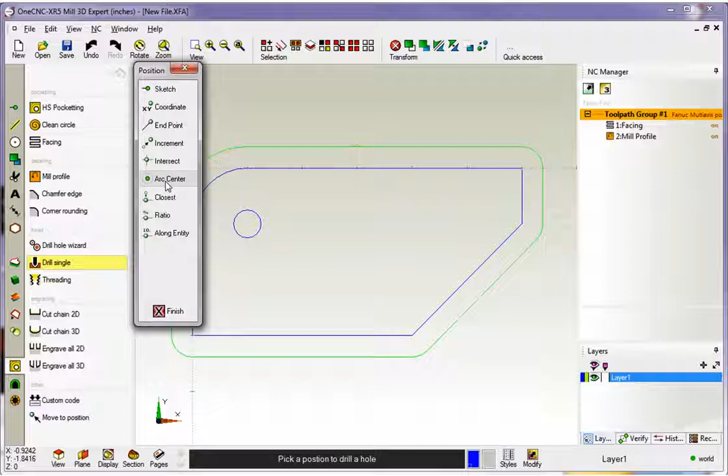I'm going to go with arc center. Just left click that, take my cursor and just left click on that arc center, and there we go, the location's in there. Now once we have the location, just like with these operations here, when we're done selecting, you want a right hand mouse click. I'm going to click finish, and then here's our first dialog box. And just like these operations here, the very first dialog box is select a tool.

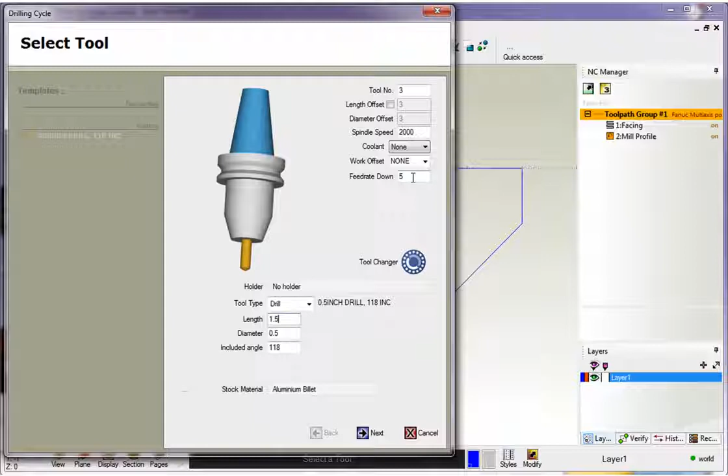Alright, so I already have the diameter in here at 1/2 inch. We've got our included angle at 118. Don't forget the length is just how far the tool sticks out past the holder. So if I change that to 1 inch, you can see that change there. I'm going to put that to 1.5. That looks good. This is your turret position. I've got 3 there. There's your spindle speed. And our feed rate, 5 inches a minute is okay for me. So I'm going to leave that alone and then click next.

Okay, so now we have our clearances. These are named a little bit differently, but you can see we have a rapid Z-plane. I have that at 1/2 inch. We have an initial and a retract Z-plane. I've got my initial set to 50 thousandths, my retract Z-plane at 0, and my final depth I'm going to go at minus 800 thousandths.

Now notice too that there's 2 very important options down here. There's machine cycles and automatic custom. Machine cycles is going to output a canned cycle like a G81, G82, and G83. Automatic custom is going to output just simply rapid and feed moves, in other words G0 and G1s. Alright, so let me show you the difference here.

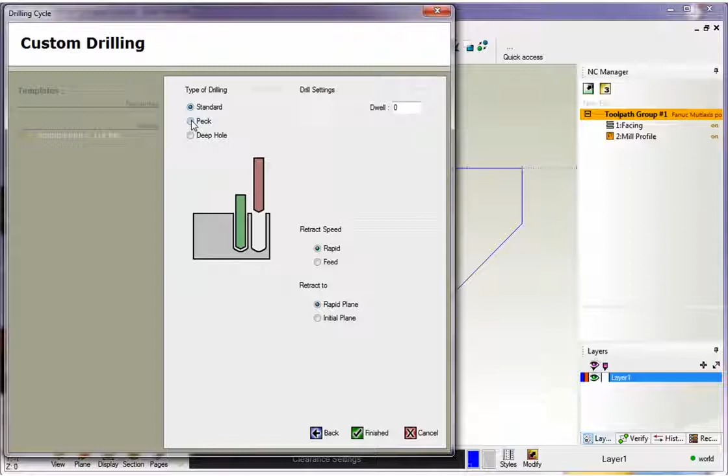If I select machine cycles and click next, OneCNC gives me a list of machine cycles I can select from, or canned cycles. Now if I click back here, let's change this to automatic custom and click next. When we do that, it's a different dialog box because we're not outputting a canned cycle. And you've got standard, peck, deep hole, and so on. I'm going to go back. I'm going to change this back to machine cycles.

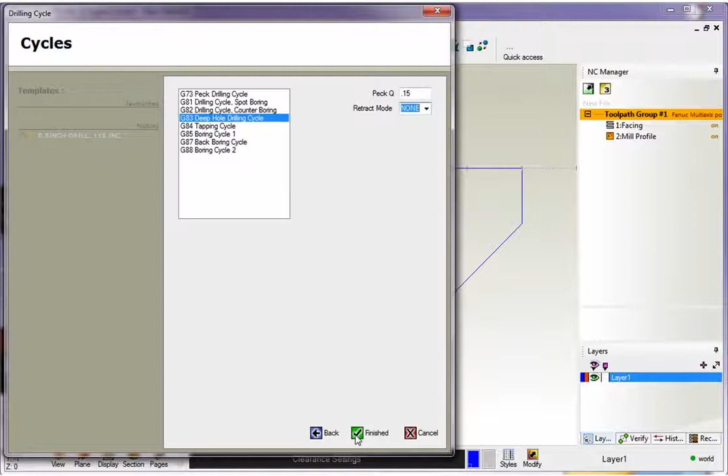I'm going to click next, and I'm going to choose the G83 deep hole drilling cycle. It's going to output that canned cycle for me. And I already have a peck increment of 150 thousandths. This retract mode, this is just your G98 and G99. I don't need to worry about that for right now. I'm going to click finish, and there we go. There is our drilling operation.

Now, before I finish this video, there's something I want to point out. Once you accumulate your machining operations, they get displayed on the screen, but they only get displayed one operation at a time. For example, right now you can't see the facing operation or the profiling operation, and as far as that goes, we're looking down on the part, we can't even see the drilling operation. If you want to see any of these, just simply left hand mouse click on the operation. You don't have to double click, just simply left hand mouse click.

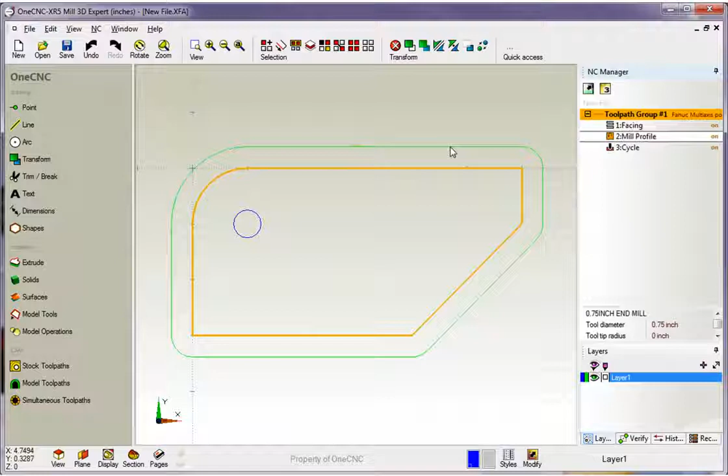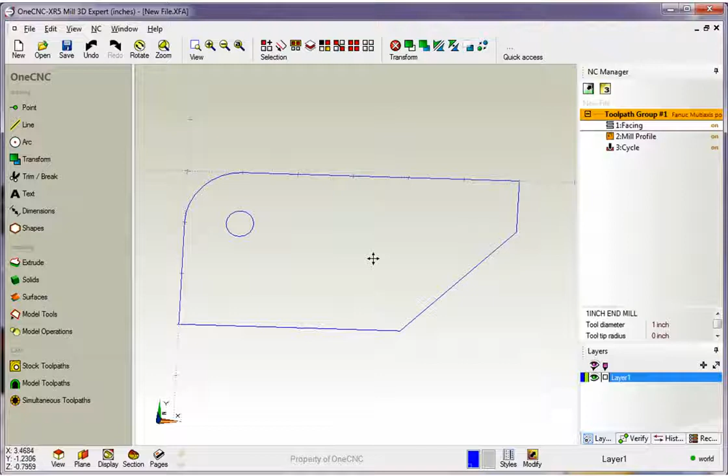OneCNC automatically does this because it doesn't want to clutter the screen with a whole bunch of toolpath. It can make it tough when you're picking geometry for subsequent machining operations. So what we do is we just show one toolpath at a time. Alright? Another thing I want to point out too is that when you have your toolpath up here, if I rotate, if I pan, or zoom in and zoom out, OneCNC is going to make that disappear as well. If you want to see it, just left hand mouse click. We can left hand mouse click on any of these. There's our profiling, and there's our drill cycle right there.

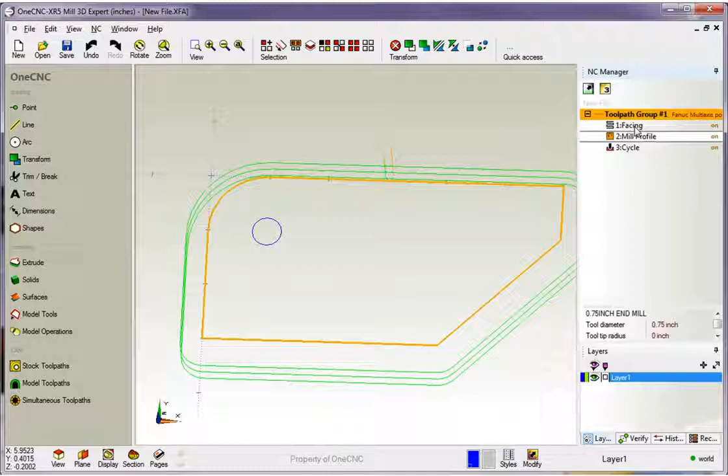Okay, so I didn't want you to think that OneCNC was missing by not showing the toolpath. It's done on purpose to keep this area nice and clean and only show you the toolpath that you're concerned about. Alright, thank you so much for watching, and I look forward to seeing you in the next video.